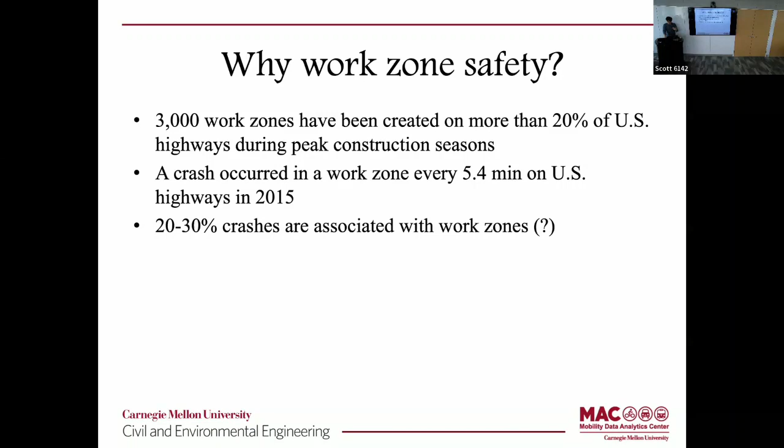So the problem statement here is that we want to infer the causal relations among work zone configurations and highway crashes. We are limiting our scope to the national highway system, freeways, highways, and then we want to look into the length of the work zone, duration, time of day, right? You deployed during the daytime or nighttime, and also how this is related to traffic characteristics. There could be heavily used main highways that carry 30,000 ADT versus a rural road, still a highway, but one that only carries a substantially small amount of traffic. And how does the work zone play a different role on these different types of roads?

And so the last one is probably something that the DOT will be very interested in, which is future references, right? Let's say we look at all the PennDOT 5 years of data, we identify, hey, under conditions X, Y, and Z, work zones are more likely to increase the crash risks significantly. And typically, whenever you have this conclusion, you want to apply the results for future references. If the state DOT is proposing some new work zone next season, they want to quantify the risks for future work zones.

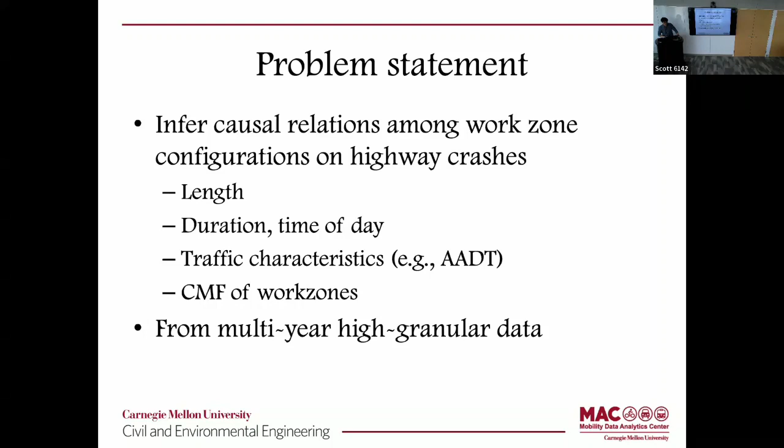Okay, so why is this challenging, right? Clearly it's very important, and there's reason why we want to do it. But why is this challenging? This whole crash analysis has been going on for decades, and people all have different approaches. I think all the approaches have certain pros and cons, but probably the most sensible one in the past 10 years that people try to work with is called the before-after.

It's very straightforward. So on street A, you have a work zone deployed for 6 months, and you want to measure before the work zone is deployed the total number of crashes, right? And then after the work zone is deployed, you measure, hey, within the 6 months, what's the number of crashes or near misses? We're still not getting a whole lot of near misses data yet. And then people can conclude, hey, crashes reduce or increase, and we can attribute that change in crash risk to work zones.

But you can see the problem. This model is likely very highly biased because a lot of things can happen at the same time that you have a work zone, right? So like I said before, let's say you have 1 day of work zone, and during this 1 day there is one crash. You can look at the year before, say 365 days, there are 10 crashes. The 10 can be normalized by 365 days, while in this 1 day of work zone presence, there is one crash. Does the work zone really increase the crash risk? If you only look at the before-after analysis, yes, right? Because the daily risk of having a crash as you observe is higher.

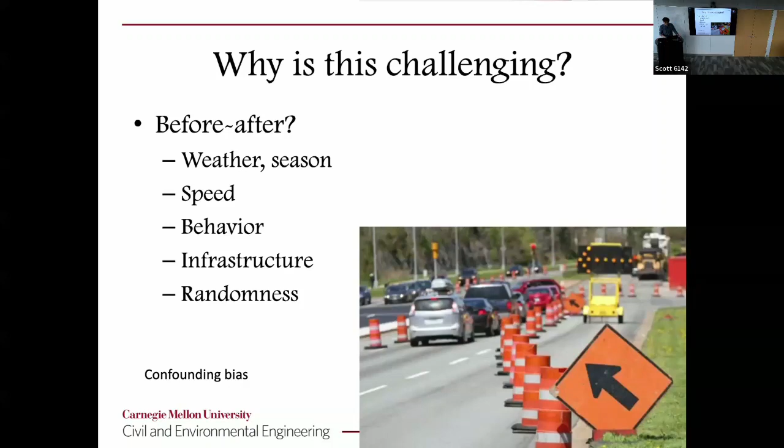At the same time, you have a lot of other factors potentially influencing your treatment, influencing the population that you're treating. So that adds a lot of complexity. That's why this is super challenging.

Like I said, most studies, as far as we have seen, focus on association analysis. They simply relate work zone crashes to different road characteristics, such as ADT. And you can see a lot of papers come back with very different, inconsistent results. Someone says nighttime work zones cause more crashes, but someone else says it's actually improved, people are seeing fewer crashes. So these conclusions are very inconsistent.

So we try to say, if we can design a more rigorous experiment, can we get the conclusion settled? We'll probably end up with very different conclusions. So I want to give you a couple of examples to stimulate the thinking on why we're doing it. You'll see later the experiment design is very simple.

But before I present the framework, this is something economists use quite a lot. It's called RDD, regression discontinuity design. I thought this could be a perfect example to apply the methodology. But just to give you a couple of examples, we can think about why things could go wrong if we just do regular regression analysis, and things can be very different.

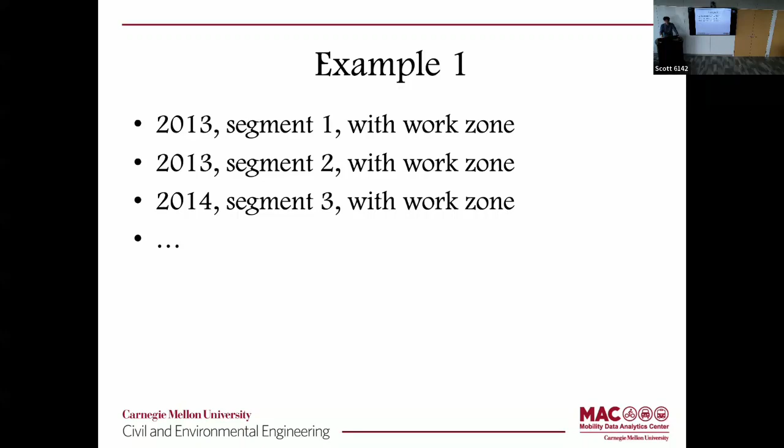So this could go wrong because you really don't have any control group, right? You don't have the same road segment without a work zone to tell you what things might look like originally. So just cross-sectionally comparing the work zone and the crash risks is not a great idea. Does that make sense? Things could go wrong because you simply don't know what the same segment in the same year without the work zone would look like, right?

The second example, think about this, right? Now say I have the same roadway segment: in 2013 there's no work zone, and in 2014, on the same roadway segment, I have a work zone. And you can do the same thing for all the 10,000 road segments. Does this make things better?

Not really, because as I already talked about, whenever you have work zone presence, because it's a relatively long time period, a lot of things can happen. Plus the change in driving behavior, changes in the built environment, changing weather conditions, changes in people's speeding could also be contributing factors. So this is clearly not good as well.

This is example 3. This is a bit tricky though. Sorry, I just made this slide last night. I need to reflect on myself as well.

Let's read it through. Let's say you have a 4-lane highway with heavy traffic, high volume ADT, with a shoulder lane work zone, versus a 3-lane light traffic highway with the rightmost lane closed for the work zone. If you were to run a regression model based on this data, you can see that ADT is a confounding factor, right? Why? Because you know the 4-lane traffic is super heavy, and you don't want to disrupt the traffic as much.

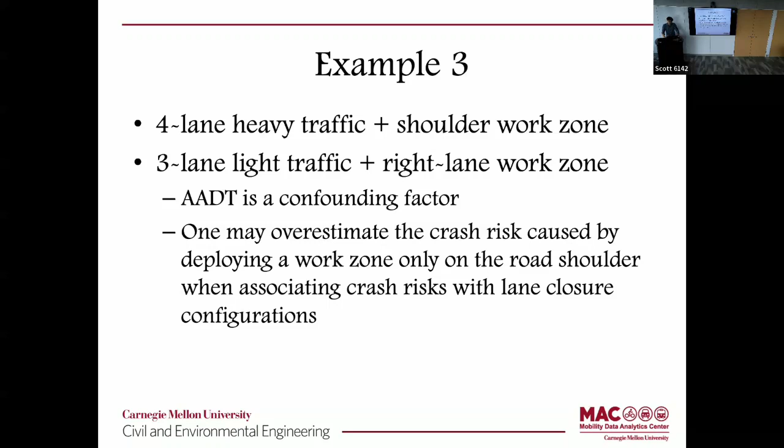So you can see these are a lot of tricky scenarios that we're just playing out, right? Before we even do the study, we brainstorm all the possible ways things can go wrong. This is example number 4. Sorry, I want to go a bit faster. I only have a couple more graphs to show you after this example.

So example number 4 is: the overall work zone crash frequency at night was lower than the work zone crash frequency during daytime. Let's say this is a conclusion you're seeing. Typically at nighttime you have much lighter traffic. So in the nighttime 6 hours, you probably see 1 work zone crash versus in the daytime you see 6 crashes, right?

Does that mean that we should deploy all the work zones at nighttime? Is this the right conclusion? Probably not, because a lot of it is also related to how the work zone configuration is being done. Because it's nighttime, you certainly deploy more technologies in the work zone, right? So if it's nighttime, there's, I think,

an MUTCD manual; each state has certain manuals asking the contractors to put out the flashing lights, and what's the interval, the spatial intervals that you need to put the cones, and the lane closure, the buffer lanes have to be this long. So there's a lot of configuration requirements associated with the choice of time of day already.

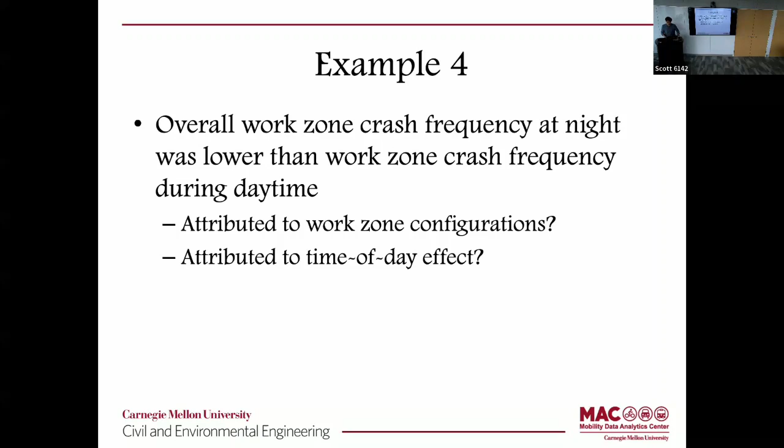So you cannot simply say, hey, I'm going to treat the road a very different way in order to change the crash risk. There are also other things that you're treating that will have to change at the same time. So that's another kind of counterintuitive finding. If we were to get this conclusion, we simply cannot conclude that we want to change work zones by time of day. That won't necessarily reduce the crash risk. That's the simple argument we try to make.

So here's our solution, right? I only have one slide about the solution, which I think is pretty straightforward. The way we design this is to minimize the bias, the changes from week to week. We only look at the short-term work zones. In this case, we only look at work zones with less than a week, right? It could be hours, could be a few days, but we're not looking at a long period of time. A 6-month or 1-year work zone is something where we believe there are quite a lot of behavioral changes that we cannot capture. So let's just focus on work zones that are less than 1 week.

And what we do is we look at a few weeks before the work zone is deployed, right? This is a shock. This is a treatment. When the road has been shocked with this treatment, we also look at a few weeks after. In this case, we test different scenarios. We started from 15 weeks, 7 weeks ahead, this is 1 week, and 7 weeks after. So we know this is with shock. This is no shock. This is no shock.

And what's nice about this is that you can reasonably assume, during this 15-week time period, right before and right after the work zone starts being deployed, that all the behavioral changes are attributed to the work zone, because if it's temperature, if it's the road, say, reconstructing the road so it could be more curved, or the pavement deterioration, these factors can be minimized, right?

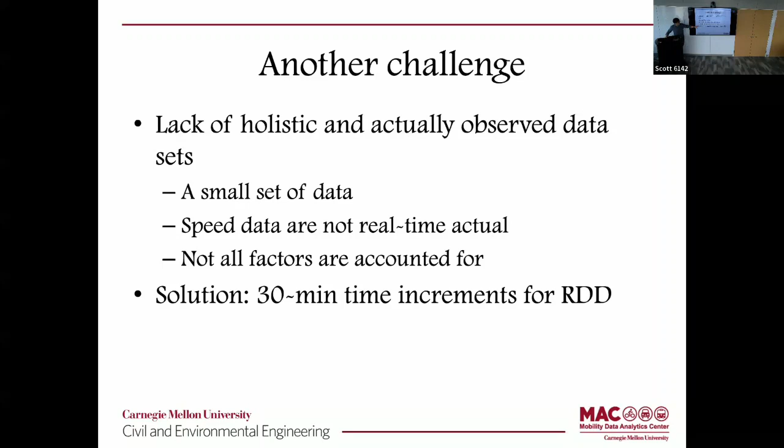But the solution here is, you can see the RDD design that we did before: we chop the data into 30-minute periods of time. We also want to rule out any of the noise in the speed measurement. So every 30 minutes is a data row that we throw into our regression model.

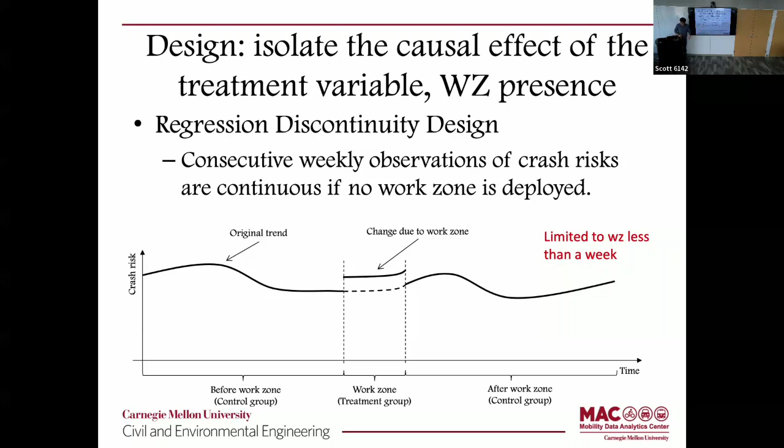We did some robustness checks. You can try to chop the data into 15 minutes, 10 minutes, 30 minutes, 20 minutes, and 1 hour, whichever way. The results are relatively robust. That's why we're pretty confident about the outcomes. But the bottom line, we are doing everything based on 30 minutes, and then we use truly observed INRIX data rather than the speed limit, which doesn't really tell you anything about what's really happening at the scene, right?

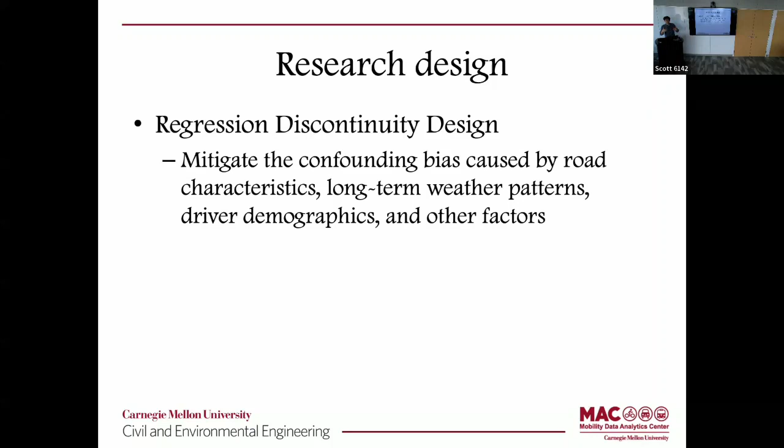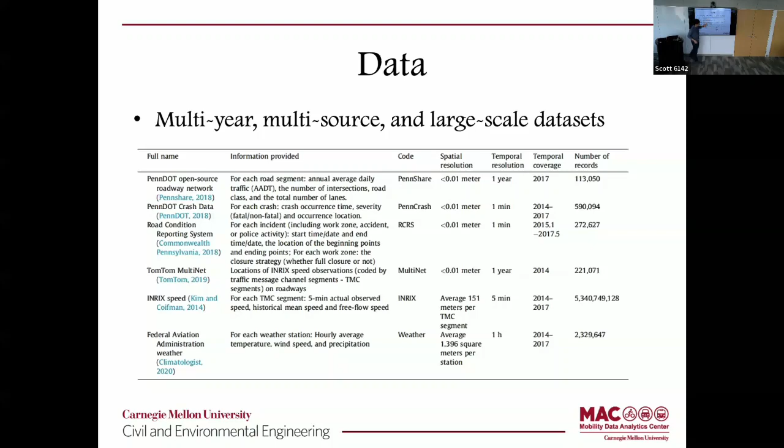You can see it's a lot of data we use. It's crash data, roadway data, PennDOT incident data feed, INRIX data, TomTom, which also tells you a little about the geography of the road segment at state level. Also weather data that comes in hourly. Everything is aligned. By the way, this is for the entire state of Pennsylvania, and it's all aligned with the same time frame, 15 to 17.

We do a lot of data processing and denoising. I mean, this whole effort of just doing the geocoding, you can see this is not a trivial problem. You have the starting point, the ending point right here, and, something I covered in GIS classes, you really have to go to all the vertices along the road, on the curvature of the road, just to pick up the entire segment of the work zone. And you also have to go a little bit further down and up, because that's upstream and downstream.

But you also need to consider the crash risks as well, right? In Pennsylvania there are certain rules for the work zone buffer, I think it's 1,700 feet versus 200 feet. I think 1,700 feet is the upstream, and 200, 250 feet is the downstream. And then we include all those distances along the same roadway where you have the work zone, just to fully consider all the factors we can and include all the crash risks.

We also look at the opposite direction. If you drive on the highway, oftentimes if there's a crash on this side, people slow down and queue up, and because people are curious and look at the other direction, you will see the queue build up on the other side as well, even though there's no crash. So we also want to see, if there's a crash on this side, does any work zone treatment on the other side affect the crash risks as well, right?

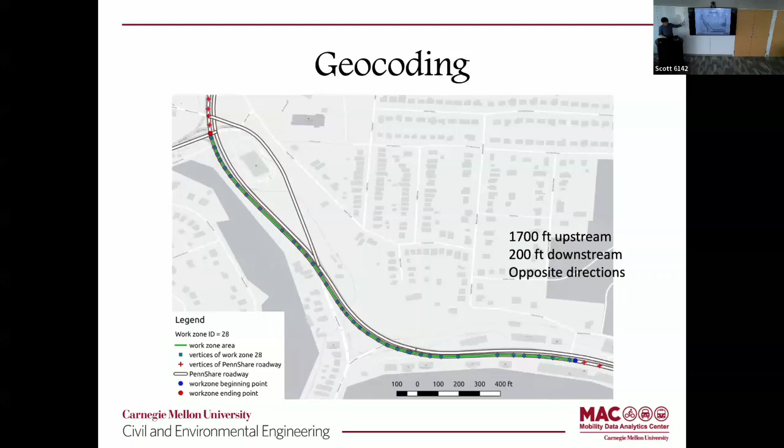And there are studies showing there are secondary crashes, because the crash occurred and people start to wait and see; they slow down, what's happening? And that could potentially create a secondary crash as well. Anyway, we try to do as much as we can. Here's the results. I have a few more graphs to show you. Okay, stop. Sorry about talking too much.

It depends on your probability, because the crash is always a rare event. Having a crash is very, very unlikely. So translating that number into a percentage change may be different. But anyway, the bottom line is that this is pretty significant overall, but particularly on the heavy traffic volume roads.

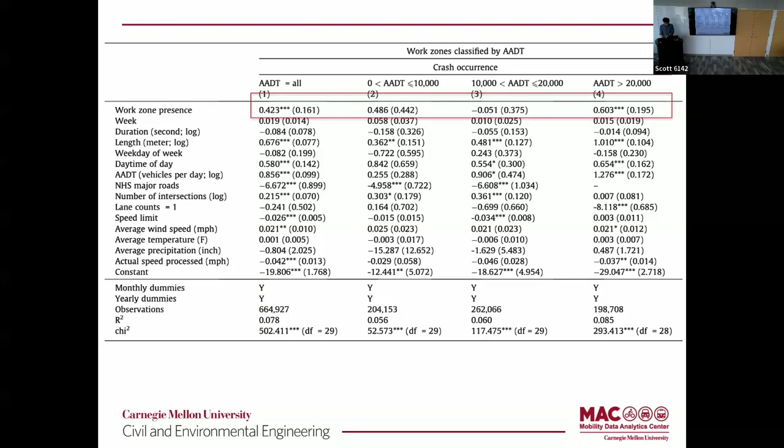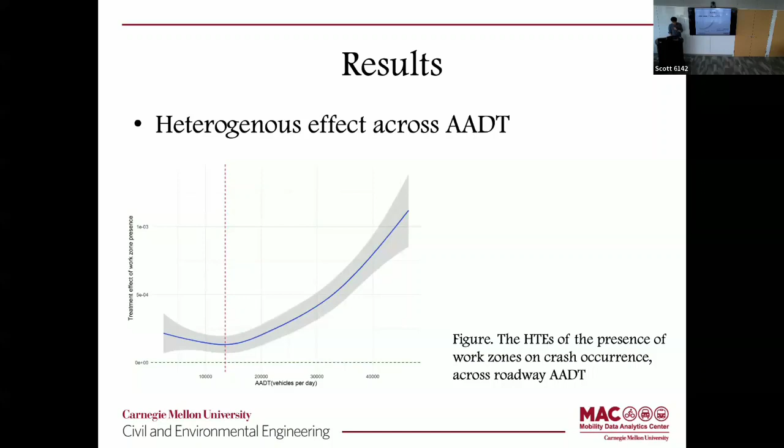Again, this is likely because of the years, we have to go down to the data between the years 15 and 17, maybe the way PennDOT deploys the work zone strategies. Could be the short-term work zone, could be, I'm only making speculations here, right? This is not rigorously investigated yet, but I'm just speculating that if it's a very short work zone, it could be a temporary permit, and the contractors can just come over, put the cones on, get the work done and walk away. Typically, it's not set as carefully as a long-term work zone, which takes about a week, which is definitely taking more resources to set up. That's just my guess. At least that's what the data tells us.

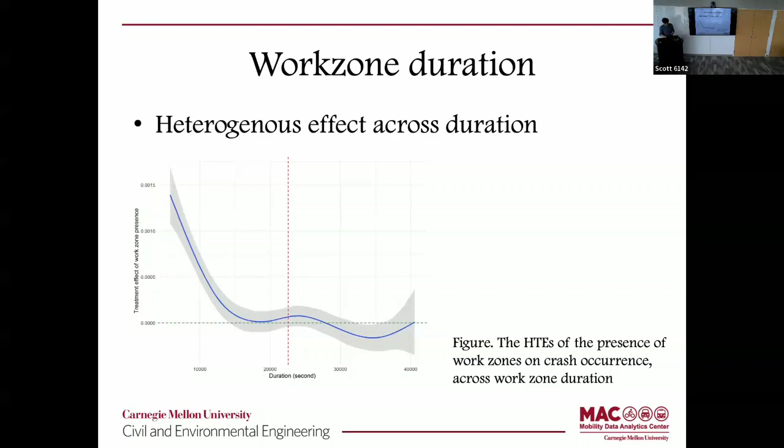We can also look into the nighttime work zone. The daytime work zone, I can tell you, the results are similar. But you can see the nighttime work zone, you will typically see it in the medium or low ADT roadway segments. You are more likely to see crash risks in the work zone compared to high ADT. Because again, the high ADT roadways at night, we interpret this as you have much more space. So the work zone does not really block the view as much, but it's these medium ADT volume locations where the work zone setting significantly increases the crash risks, but not as much as the daytime.

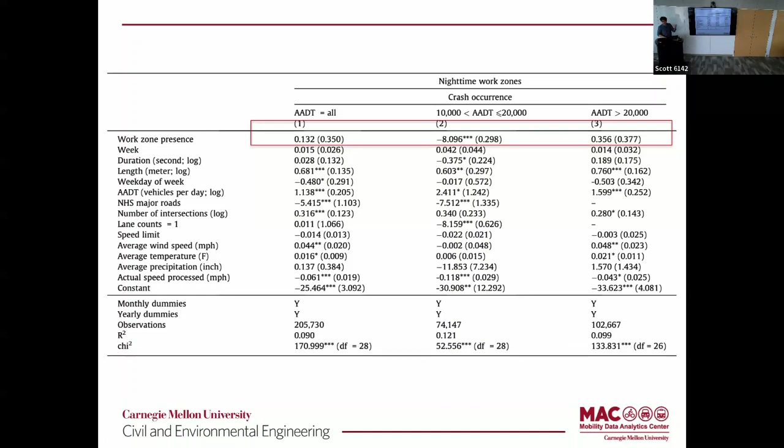But again, we cannot say that because the nighttime work zone has more crash risks, you should switch all your daytime work zones to nighttime. I think again, this is because of the way PennDOT sets the work zone during the daytime; all the resources required to set up a work zone during daytime will be very different from what's required to set up a work zone at nighttime. So we are simply saying, if you continue the current deployment strategy, current deployment configuration, we can tell you that if you do a work zone in this way, at this ADT, the medium traffic volume highways, yes, it does increase crash risks. That's something we want to further investigate, how we can continue to reduce that.

Sean, can I ask a quick question? I'm surprised the average precipitation has a negative impact. Rain reduces crashes? Yeah, because everything is correlated. So for the weather conditions, we're not really paying too much attention to the numbers, significant or not, because these are highly correlated numbers. So the significance level may not make sense in this case. Yeah, so I think the key is to look at the first row, because based on the RDD design, we try to rule out all the other possibilities. So we're hoping this significance level will tell us a lot about the causal effect. Yes, that's right. So we also see that this is not significant as well, because you're just throwing in so many control variables and a lot of them are related.

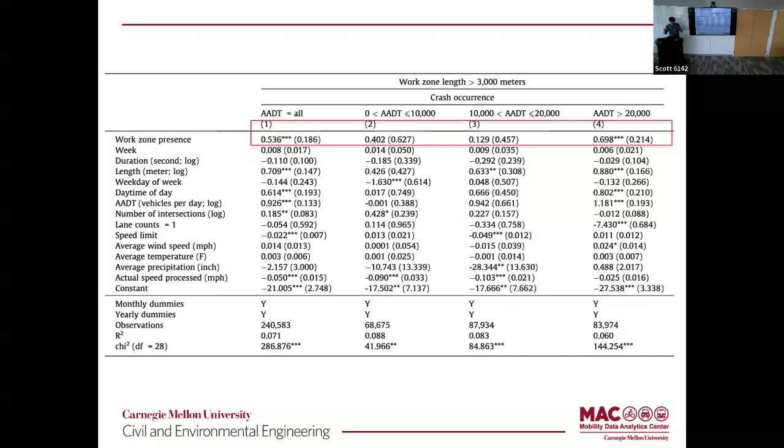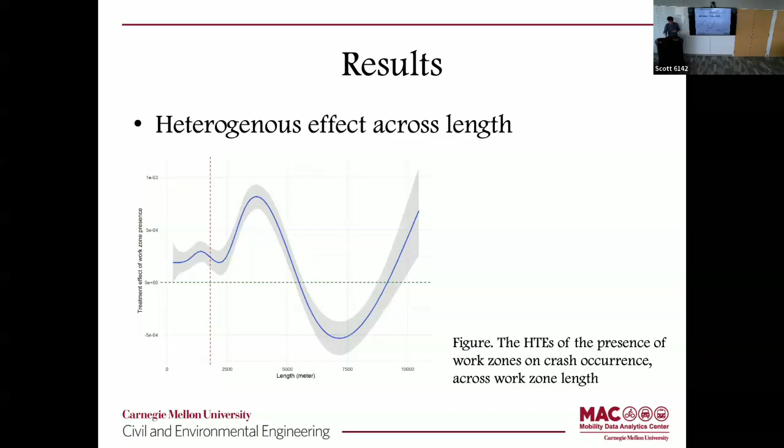Again, bottom line is that for long work zones, right? If you're deploying the work zone, it's a long work zone, and we switch it on, yes, it does create more crashes. So I'm skipping. This is also about the CMF factors that we can calculate for PennDOT. Right now, we're doing the same thing for Maryland. I'm hoping to do the same thing for California too.

The last slide, this is just to tell you a little bit more. Everything I presented is results, right? But behind the scenes, we actually did a whole lot more than the work I'm showing you, because we want to make sure everything we present is solid. And the way we do this is we do robustness check tests. Sorry, I should use the plural. But we do so many tests.

For example, we randomly pick the shock. We did the placebo test, temporally and spatially, right? And we know right now the exact time the work zone is actually being deployed. But we can fake the data, fabricate the data to say, hey, what if we don't know exactly? Let's switch the time, randomly pick any of the 15 weeks that we used for data, just randomly draw: maybe it started the second week, maybe it started the 10th week.

So we can do that spatially and temporally just to see if the results are still giving us the same results. If it still does, it means that there was something wrong with our results, right? If it doesn't make any sense, it means the data might be valid, and the results might be true. We try a lot of other things. We also try different models. By the way, the model that we use is Logit, binary logistic regression. But for these rare events, with data showing very clear overdispersion patterns, we also try other models as well.

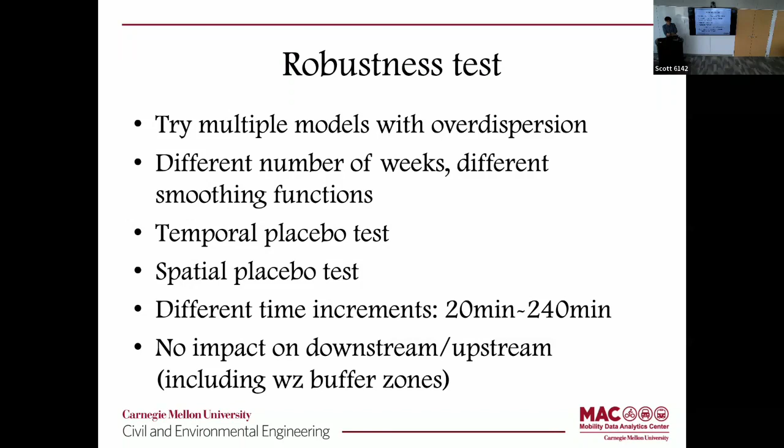Okay, so you're gonna have to trust me on this. We did everything. The tests are not giving us sensible results, so thumbs up on our final conclusion, everything I just presented. Okay, here are our two papers that we just recently published. Again, like I said, we'll continue working on getting more data and applying the methodology to other states as well. Happy to take any questions.

Yeah, I assume that when there's a crash in a work zone, there's a lawsuit involved. And I was wondering, have any of the lawsuits influenced how a work zone is designed or operated? Yes, I'm sure it does. It's way beyond my expertise. I think most of the states, PA, Maryland, Virginia, they all have their own MUTCD requirements that dictate how the contractor should put out the work zones. I'm sure as part of the design they have done some experiments. It's many decades of accumulated technology and experience. I'm sure they have considered all the possibilities to reduce the risk, or maybe reduce their liability as well.

Yeah, but again, this is part of how the work zone is being deployed. Our study is trying to say, given the same configurations in which the work zone is being deployed, is there any problem? Yes or no? Does it increase safety? On what roads, under what conditions are you likely to see an increase in crash risk? Then we can investigate further.